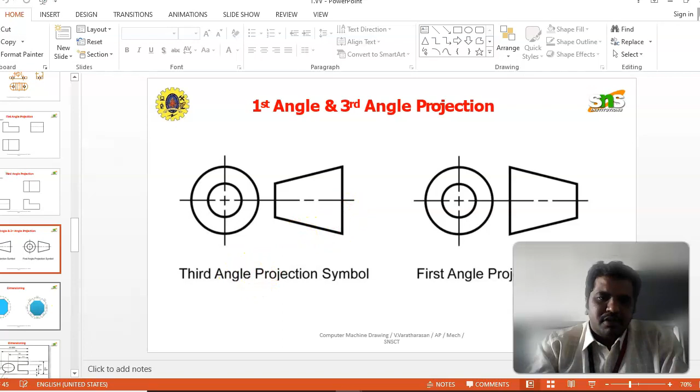So next one is the dimensioning. In the dimensioning part, we are giving so much importance, because not only in industrial drawing but in the normal manual drawing methodology also, we give so much importance to dimensioning and lettering, because it gives a clear representation in the presentation part. So the presentation of the particular drawing will be good and legible. Then only the observer, if we take a machinist, can identify whether the dimensions of the particular product are understandable. So here are some of the dimensioning methodologies and tools which were followed in the previous manual drawing method. So here these are the representations.

So we can give the dimension representation by using an arrowhead. The arrowhead is a closed arrowhead with shading. A closed arrowhead or an unclosed arrowhead without shading is a bad representation, and also an incorrect method. So we just want to follow this method.

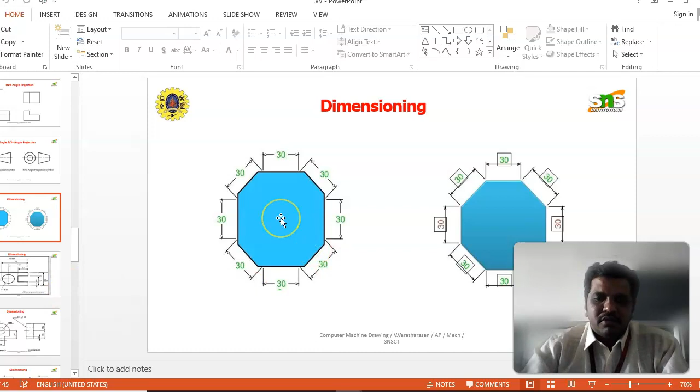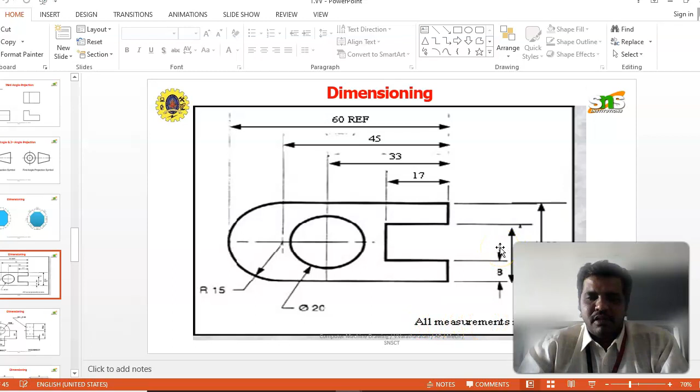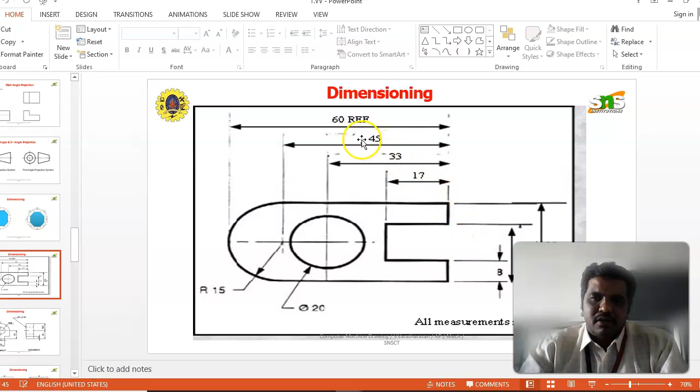So this is also the dimensioning of a mechanical part. Here they have given a length dimension, the diameter of the circular hole, the radius of the circular hole, and then the distance between the slot. These are the width of the particular product. These measurements will be given, but in the title block they represent all dimensions, all measurements in millimeters. So this is a very important terminology we are using in the title block. Without stating all dimensions are in mm, it may be read as centimeter or meter. So a lot of dimension terminologies we are going to use.

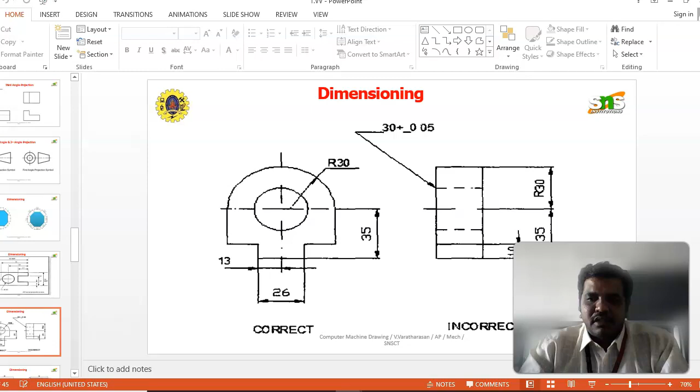So here we are giving the comparison between the correct and incorrect diagram. The left side is the correct diagram, and the right side is the incorrect diagram. The correct diagram shows the symbols and the arrowhead symbols used in a legible manner. The incorrect diagram uses them in a non-legible manner. So that is the thing.

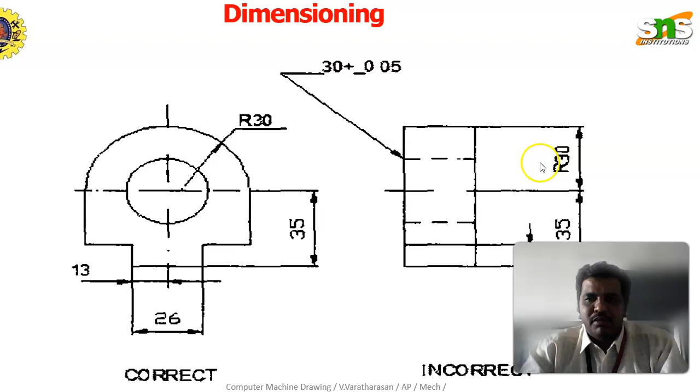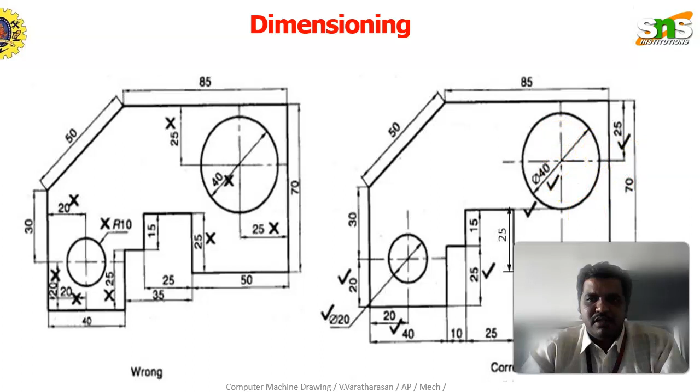So here also the same thing will be happening. The 50 is the measurement of the square rod. In the square block, there is a circular hole over here. For the circular hole, the dimension of the hole from the center point, that distance will also be given, and the overall length and width measurement will also be

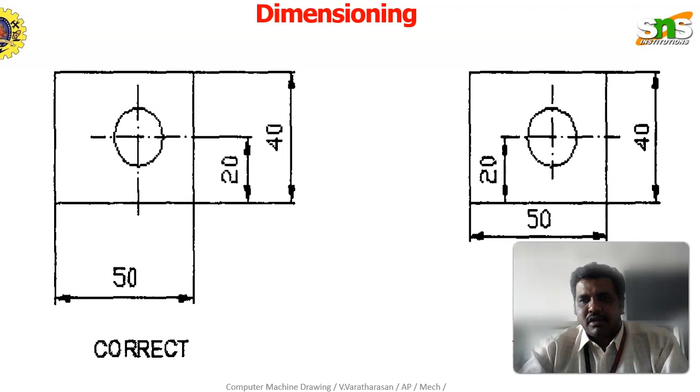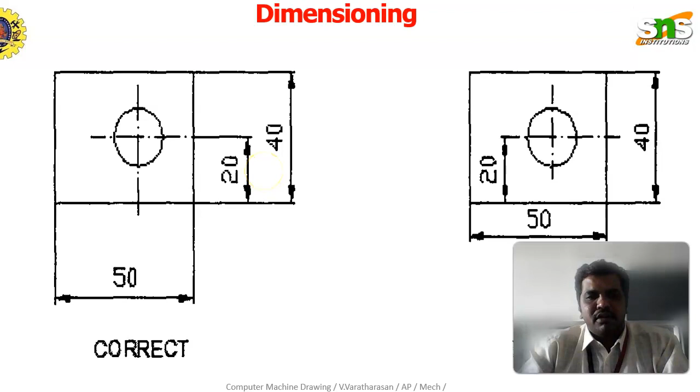given. So in between the dimensions, we must give a proper ratio of gap. Without a gap, if we are representing dimension over dimension, it will not look good, and it will also be incorrect. So here are the correct dimension and incorrect dimension methodology in the diagram representation.

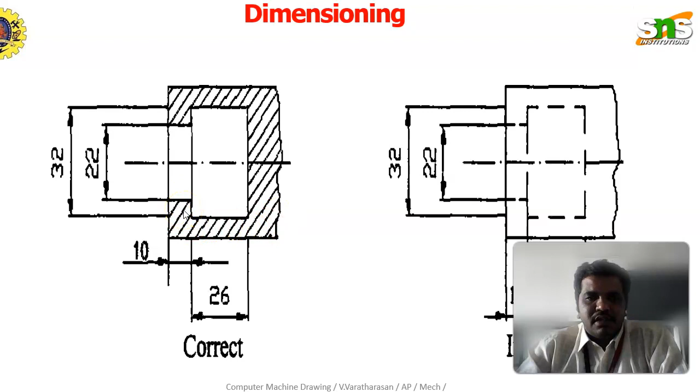In the cross-cut sectional view, they are representing the sectional lines. So these are the sectional lines, 45-degree lines, shown in the figure now. This section line we always represent in the sectional view of the product.

So here the lettering is another important terminology, and it is an important part of the diagram. The lettering should also be very legible. If you are using lettering, it should be in a proper format. Both capital and small case letters and numerals should be given proper space, by using an HB pencil. That is a very important thing.

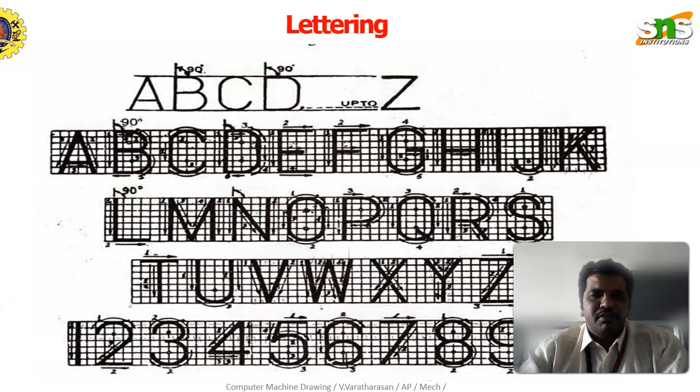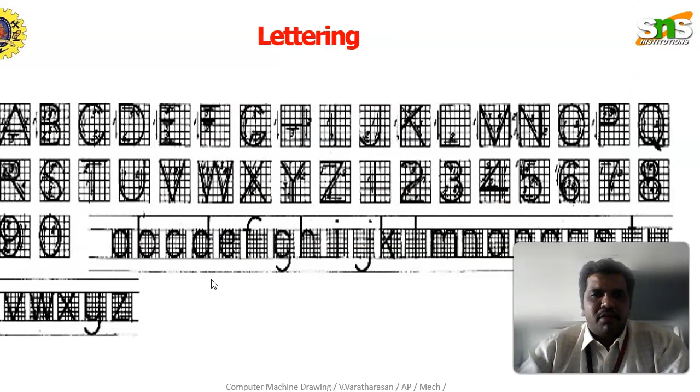Here there are three types of pencil we are using: H pencil, 2H pencil and HB pencil. With the HB pencil itself we are using three types of thickness in a single representation, but in the manual drawing method they use 2H and HB separately. So this is the proper lettering format given here. Both the capital and small case letters are represented in this slide.

If you are going to draw a pentagonal plane or lamina sheet, we can't draw it directly with respect to the base side dimension. So by using the base side dimension and the 108 degree inner angle or 72 degree external angle, we draw the angle line. On that line we measure the baseline length. Then, by using a compass or divider, we can represent the measurement in the pentagonal shape. The same proper procedure is available for the hexagon also.